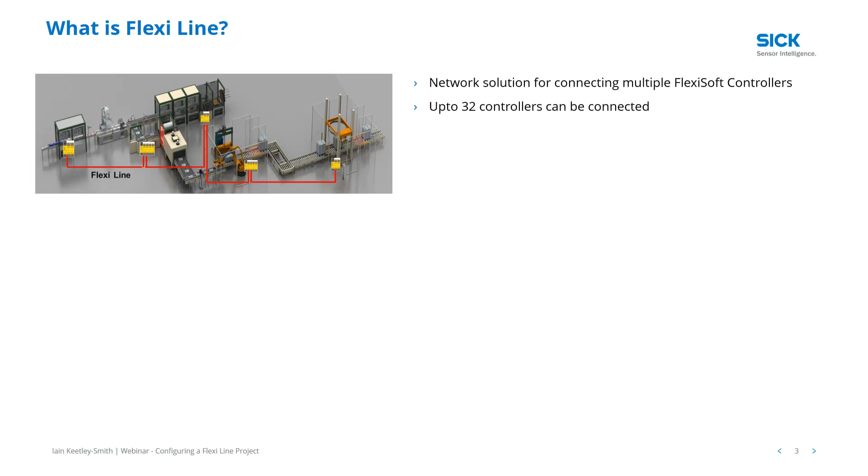And how we achieve that is through a twisted pair wire, as shown on the left hand side there. You have a twisted pair wire which comes out of one controller and then goes into the next, and then out and in, out and in, and it's basically a series connection of the Flexisoft controllers through that twisted pair cable. You'll see as well that you have a number of LEDs built into the CPUs. We have an MS LED, which stands for module status, a CV light, which stands for code validated. We then have a dedicated LED telling us the status of the Flexi Line, and then we also have 2 LEDs which are for EFI, which stands for enhanced function interface.

So in order to have the functionality of Flexi Line, you have to use what's called CPU 3. There are 4 CPUs available to you within Flexisoft Designer, and you have to use the highest one, CPU 3, to get this line. Now the maximum distance between each of these CPUs is 1 kilometer. So it's a system which can be used to cover vast distances. Imagine you've got 32 controllers connected together with 1 kilometer between each controller. You can see that we can go large distances with this Flexi Line solution, and it's all over a twisted pair wire.

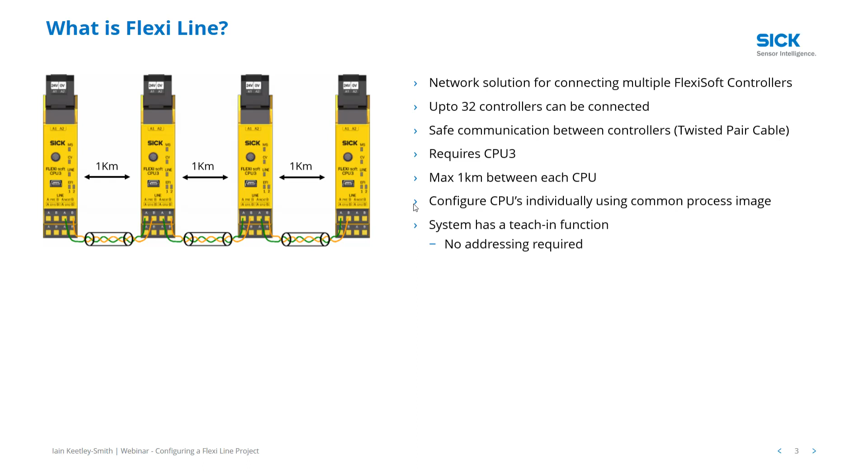There's no addressing required when it comes to the CPUs. There's no dip switches, there's no software addressing, nothing. It's all done in the background for you, so it's nothing to worry about. All you've got to do is have a common process image. Now the communication works by having a previous station and a next station, and you can see that clearly highlighted there on the CPU 3 itself.

Another thing you'll see on here is you have a standard M8 connector for programming, but with the CPU 3 we also have the option to program it via a USB connector. So 2 different options to program the CPU 3. Whereas the CPU 0, 1 and 2 can only be programmed through this M8 connector unless you're using an Ethernet based diagnostics card. So it's quite simple to wire up. As you can see up here, you've got 2 wires and they go to your previous and your next, and previous and next.

So it's a very, very simple system. And as I said, stations can be removed and added. Every time you remove a station or add a station in, you have to reteach, and that reteaching is done either by a software command within the logic, or it could be done by connecting Flexisoft Designer software to the CPU and teaching it from there. So two different ways of teaching.

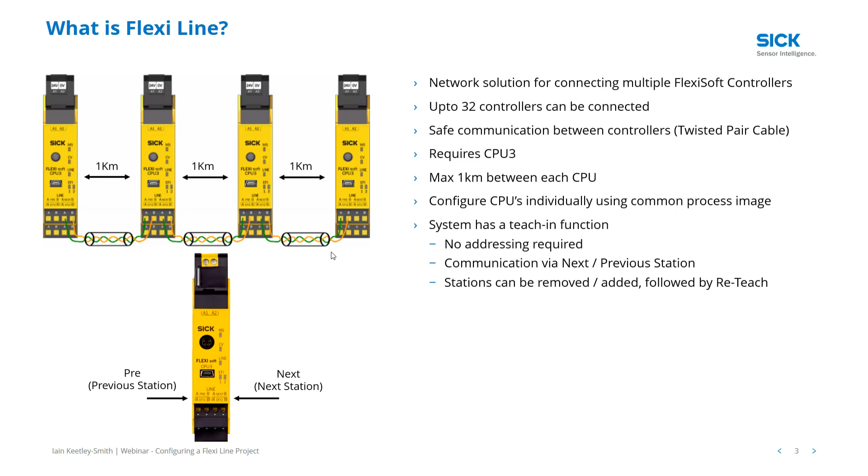So here is an example of how this system works. So what we're going to look at here is an emergency stop and a reset signal. So you can see up the top here we have what's called the process image, and all of these controllers down below are all talking and listening to that process image. So imagine first of all that all of our machines are running. So you can see all the motors running down at the bottom there.

What we're going to do is press an e-stop on the left hand Flexisoft unit, and you can see the e-stop flashing there. What will happen there is the motors at that station will stop. It will then send a signal up to the e-stop in the process image, and the other controllers will see that an e-stop has been pressed, and they will stop their local motors as well.

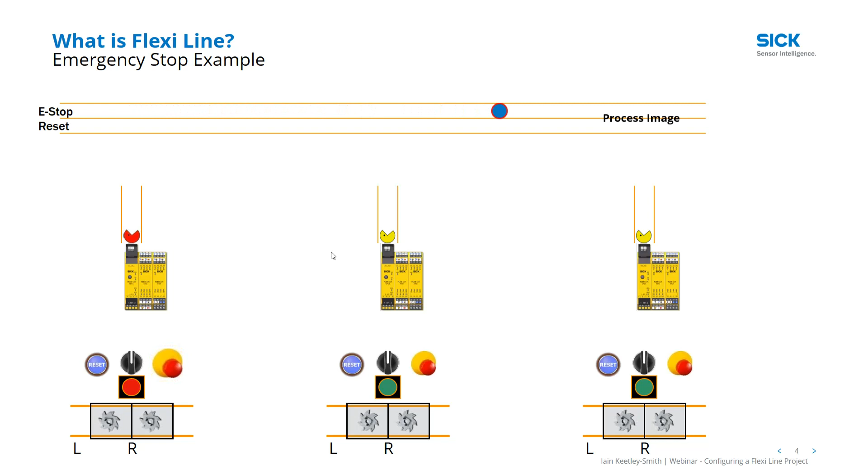So let's watch this. So we press the e-stop and the local machine stops. Then it sends a signal up to the line, which is then consumed by the other two, and their machines stop in turn. So that is how we share e-stop data between the different controllers.

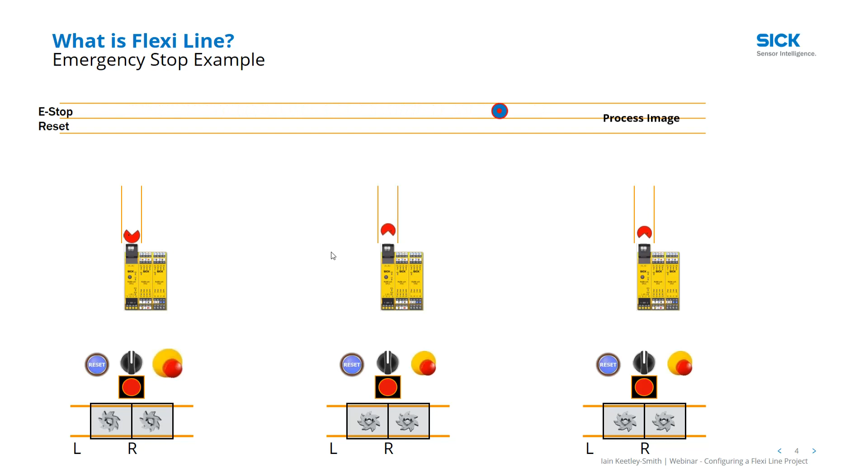Now if we look at the reset signal, so here's the reset, and what we're going to do is we're going to reset from the center station. So when you press that, what will happen is first of all the local machine will start to run, so you can see the motors turning, and then it will send a signal up onto the process line. So there's the signal going up, and the other two controllers then consume that reset signal, and their local motors then run. So hopefully that's understandable, because what we're going to do now is we're going to look at how you actually configure this within Flexisoft Designer.

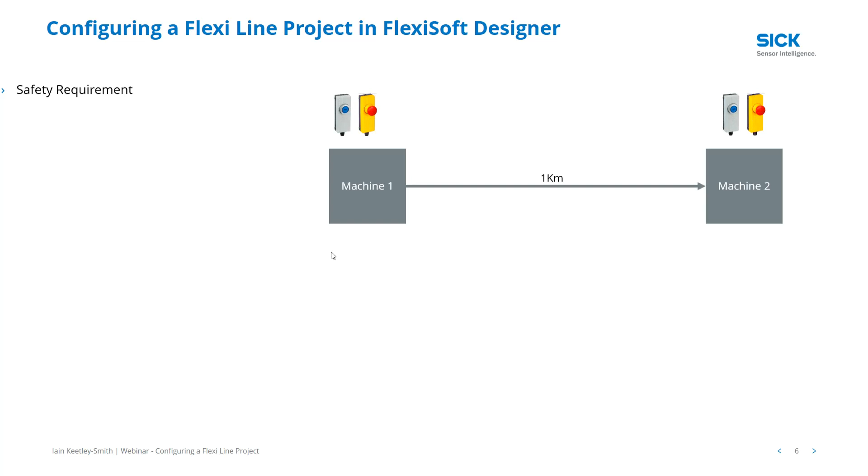So first of all, we have to understand the safety requirements. So we're going to just keep it nice and simple and have two machines, and between those two machines we have 1 kilometer in distance. Machine 1 has an e-stop and reset, machine 2 has an e-stop and local reset, machine 1 also has a light curtain, machine 2 has a switch, a door switch.

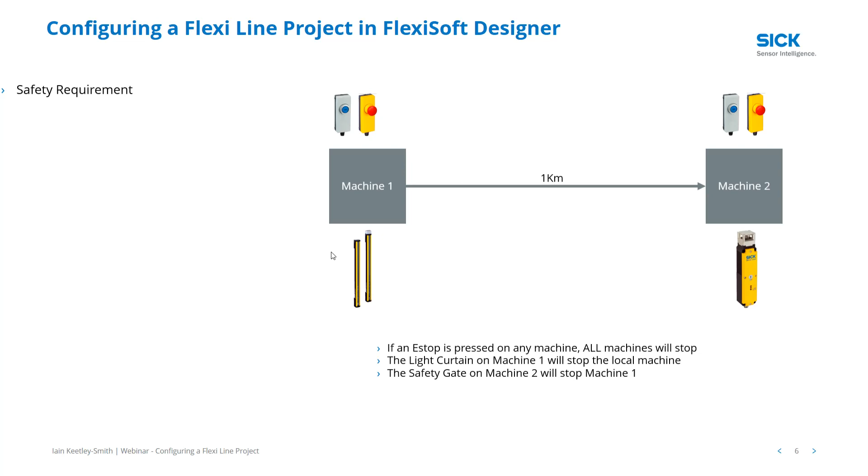So how we want this system to work is if an e-stop is pressed on any of these machines, I want all the machines to stop. So if I hit an e-stop on machine 1, I want machine 1 to stop, and I also want machine 2 to stop, and vice versa. The light curtain on machine 1 will only stop the local outputs on machine 1, but when I open up the gate on machine 2, I want to stop the local outputs on machine 2, but I also want to switch off machine 1. So hopefully that is understandable.

So let's move that over to the side. We'll keep it there just so that you can keep a reference to it, and we're going to open up Flexisoft Designer. So the first thing we do is we click on Create a New Project, and that will then open up the user interface for Flexisoft. And we have the option of our CPUs. So there's 0, 1, 2, but because we're using Flexi Line, we're going to use the CPU 3. And then the CPU 3 goes into the configuration area.

I'll grab an XTIO module, and now I'm going to start putting some elements on here. So I'm going to add a dual channel e-stop. Now I also need to add a reset push button, so I'll grab a reset and add that onto input 3. And I also have a light curtain on machine 1, so go and choose a light curtain, and we'll choose the deTec4 and add that on there.

And then I'm just going to go and select some outputs. So we're going to go for a motor, which we'll put on Q1, and a lamp, which will populate onto Q2. So that's us done our inputs and outputs, and now we're going to add a Flexi Line. So we just click on here and then drag that over and drop it down onto the line. Now you have the option here of going for a new definition or an existing, so we're going to have a new definition.

And first of all, you can see there's a unique checksum for the actual definition. We also have the ability to import and export definitions. And we want to go 1 kilometer between machine 1 and machine 2, so we drag this cycle time over until it goes green, click on the 1 kilometer, and then we go to the byte, and we have 4 bytes of data that we can send at that scan rate over a kilometer.

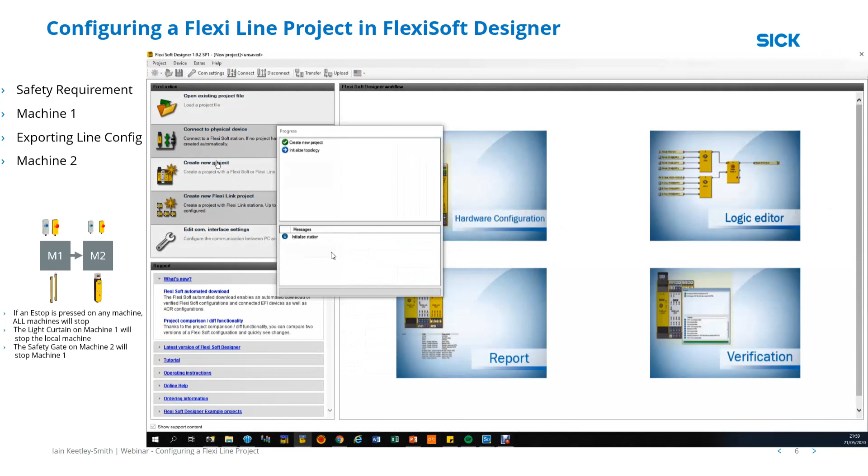And just to point out here, when you're doing Flexi Line, you have to program each station individually. So here's CPU 3 again for our machine 2. We're going to bring in our XTIO, and on machine 2 we've got, as you can see on the left hand side there on the image, a dual channel e-stop, a reset push button, and we also have a safety switch.

So there's the e-stop, there's my safety switch. You can see there's lightning bolts there because they're using test pulses. There's my reset push button, and then I'll add in some local outputs on there as well, as we did before. So we have a motor from Q1 and a reset required lamp which we put onto Q2.

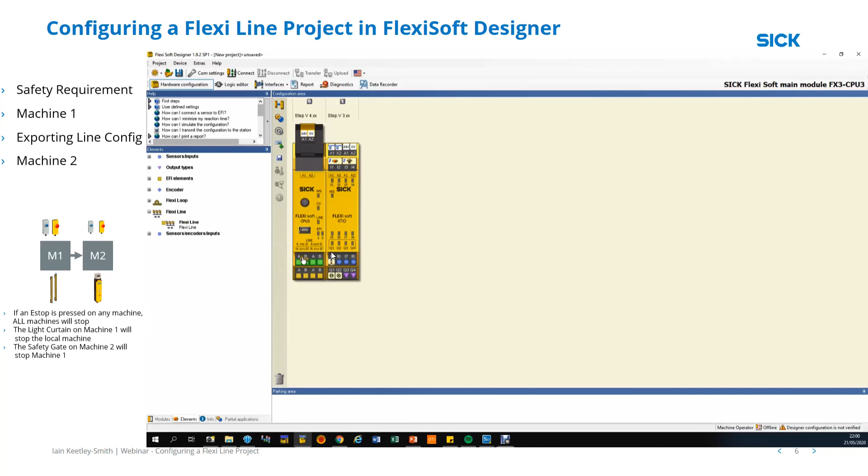Then we go and pick up our Flexi Line and drag that over and attach it on there. And rather than creating a new one this time, we're going to go for the existing Flexi Line definition, and we're going to pick up the demo webinar file. Now when it opens up here, you'll see that first of all the checksum is exactly the same. We still have a kilometre, 32 bits, and when we go into the byte configuration, there's your emergency stop, and there is your safety gate.

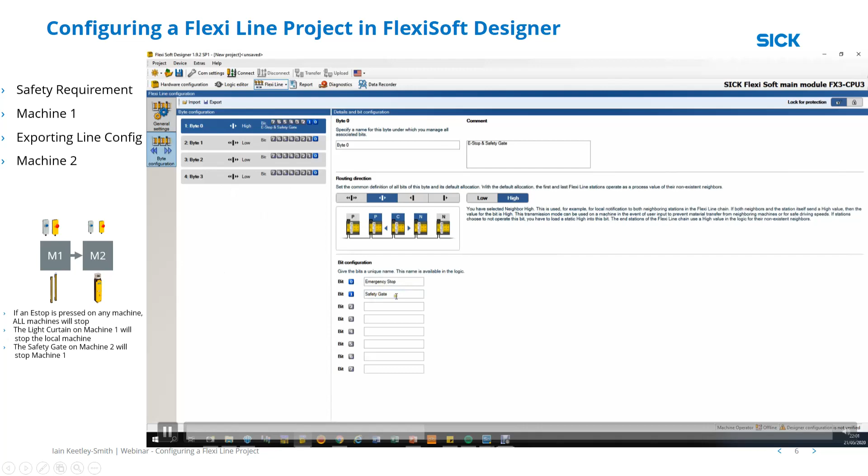So let's go in and start doing the logic now for this. So just make this bigger again so you can see better. So there's my emergency stop, and there's my safety switch. Now both of these signals will be going up onto the process image. So we're going to go for routing N to N, bring that up, and then play a game of join the dots again. So e-stop goes to input 1, and your safety switch goes to input 2.

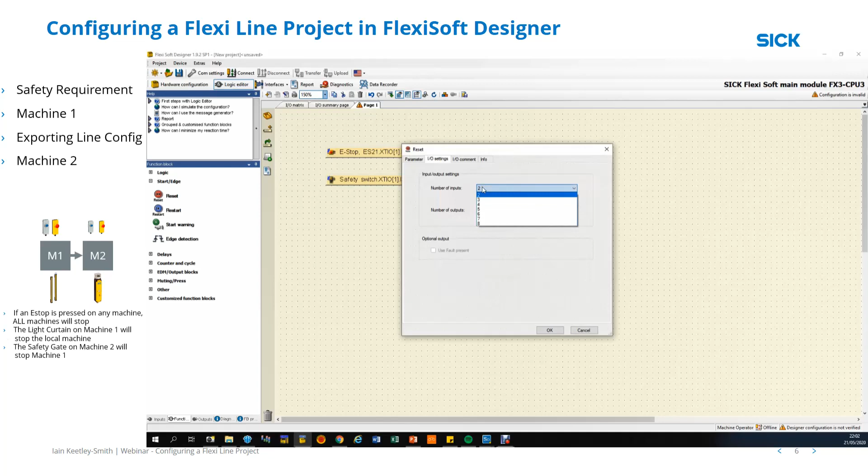I'm then going to go to outputs on the Flexi Line, and there's your 2 bits from your process image that you've defined before. So there's the emergency stop and the safety gate. So the emergency stop in machine 1 affects that bit e-stop on the line, as does machine 2. I'm going to grab my reset block, double click on it, and this time we're just going to have 3 inputs, and say OK to that.

We have our local reset, which goes to our reset input, and then we have the emergency stop from the line, which will go to release 1, and we'll also take the safety gate and attach that onto release 2, like so. We'll go to our outputs, go to our XTIO and take our motor over, and then we'll take the lamp over as well and attach that onto reset required. Hopefully this is all making sense. Then we're going to simulate it.

So I'd better hit the play button on the simulator. There we go. So the e-stop is healthy and the gate is closed. That means that those bits there will come on, and we can then reset machine 2 and get the motor running on machine 2. If we press an e-stop, then the e-stop will drop. Now it's also dropping on machine 1 here as well. So machine 1 and machine 2 would require resetting in this example. If I open up the gate, it drops. Again, machine 1 will be stopping because it's looking at that safety gate bit in its logic.

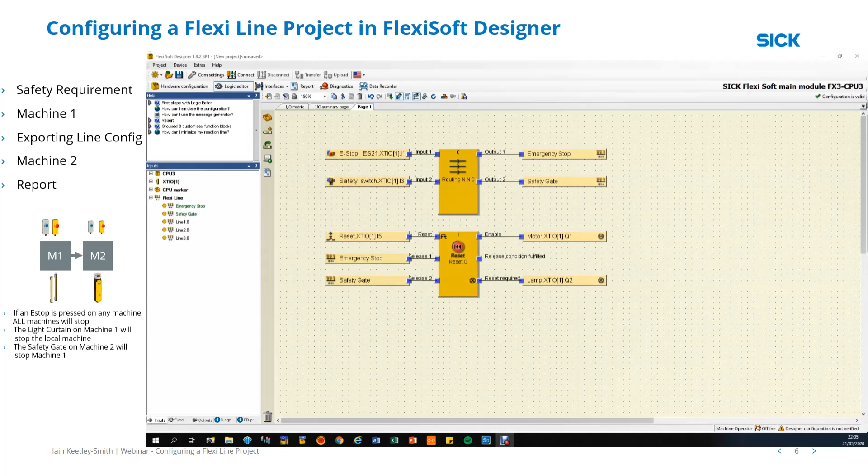So we've now written the software for machine 1 and machine 2. It's quite simple. Like I say, we've only got 2 bits going up on the Flexi Line, the emergency stop and the safety gate. So what we'll do now is we'll go in and start to have a look at the report. To get to the report, it's just up here at the top bar, click on report, and that will open up a report for machine 2.

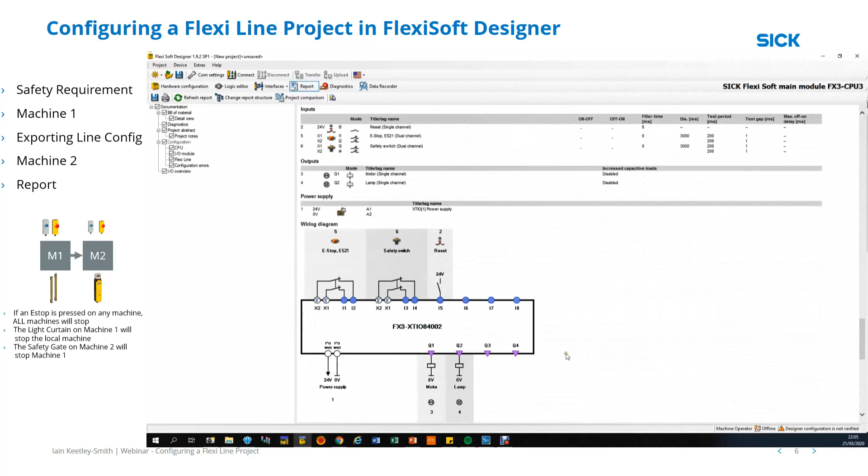So you'll have to have a report for machine 1 and machine 2, and this report will form part of your technical file. There's your part numbers, and then if we scroll down, as I pointed out in every webinar, there is your vital information with your CRC checksum and when it was verified and the date and time. Down here you have your logic. This is for machine 2. If we keep scrolling down, you'll then see how it should be wired. So we have a test pulse coming out of X1 through that contact to input 1, X2 through the second into input 2, and the same for the safety switch.

So we're sending a digital waveform through there, 24 volts into the reset, and there's my local outputs. And here is my Flexi Line information. So you can see it's 8 millisecond cycle time, 32 bits, 1 kilometre, the baud rate there, and then you've got the checksum for the line at the end. And then down here you've got your configuration of bits, so there's your e-stop, it's just sending it to its neighbours. And the default value is 1, so whenever you hit an e-stop you're dragging that 1 to a 0.

So all the information is there for machine 2, and you would go and do exactly the same for machine 1. The report would look very similar, but obviously the logic would be different, but the details on the Flexi Line would be the same. It would be the same checksum there.